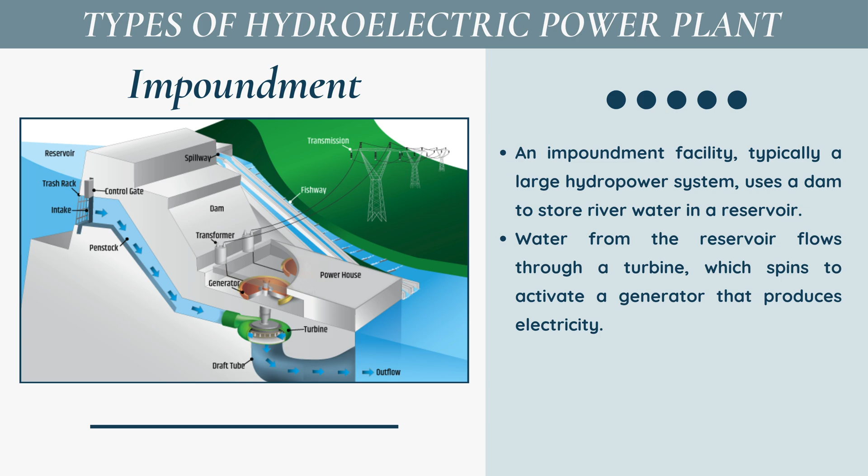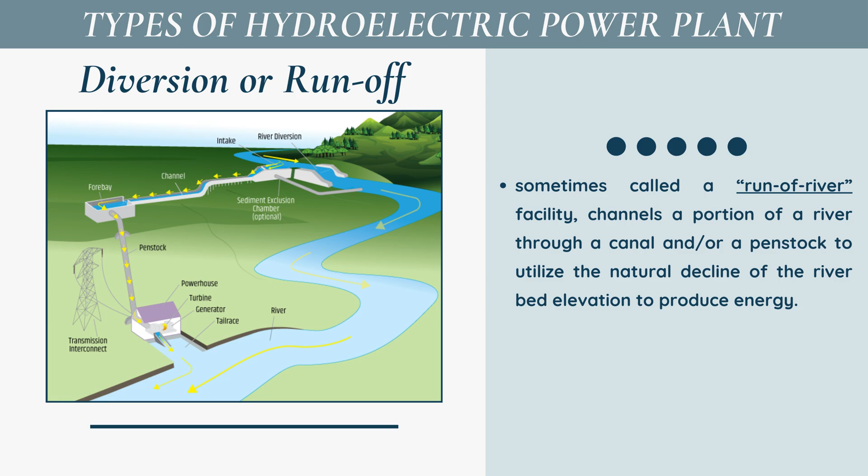The next type is diversion or runoff, sometimes called a run-of-river facility. It channels a portion of a river through a canal and/or a penstock to utilize the natural decline of the riverbed elevation to produce energy.

The last type of hydroelectric power plant is pump storage. It is called pumped storage hydropower or PSH, which works like a giant battery. A PSH facility is able to store the electricity generated by other power sources like solar, wind, and nuclear for later use. These facilities store energy by pumping water from a reservoir at a lower elevation to a reservoir at a higher elevation.

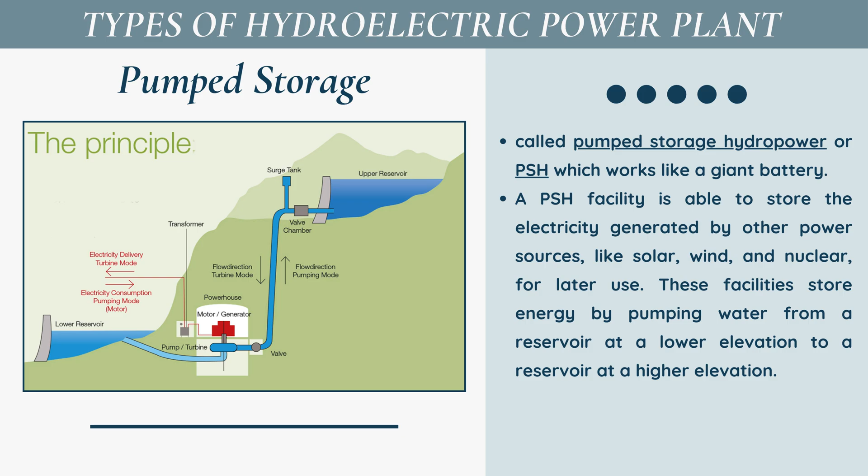The water is released from the upper reservoir to power hydro turbines located below the upper reservoir. Pump storage hydroelectric systems generally use more electricity to pump water to the upper water storage reservoirs than they produce with the stored water. Therefore, pump storage facilities have net negative electricity generation balances.

There are four types of turbines used in hydroelectric power plant. The first one is Pelton turbine. It is a type of impulse turbine and is designed to harness the energy of high-pressure water by directing it onto specially shaped buckets or cups attached to the turbine wheel.

Next is Kaplan turbine. It is a type of water turbine used in low to medium head sites. It features adjustable blades that allow it to efficiently adapt to varying water flow. This turbine has an axial flow design and is known for high efficiency in changing conditions.

Third is cross-flow turbine. It is a type of water turbine where water flows across the blades in two directions, first radially and then axially. It is typically used in low-head, small-scale hydroelectric plants. This turbine is simple, compact, and efficient for applications with moderate water flow.

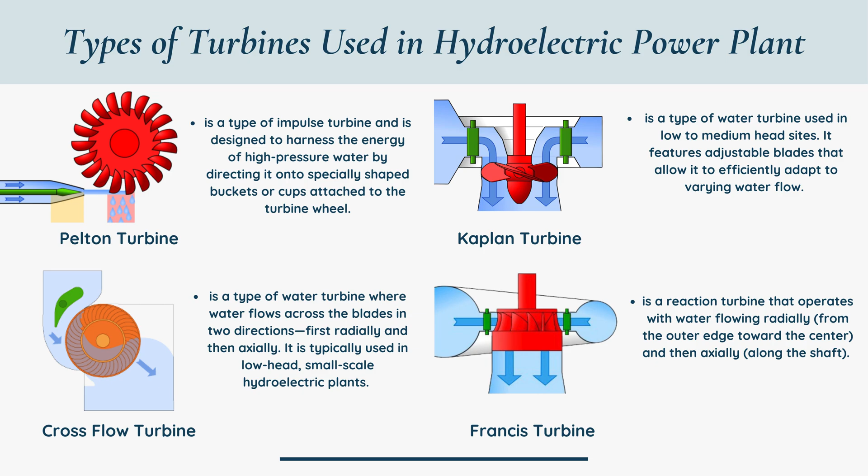The last one is Francis turbine. It is a reaction turbine that operates with water flowing radially, or from the outer edge toward the center, and then axially, or along the shaft.

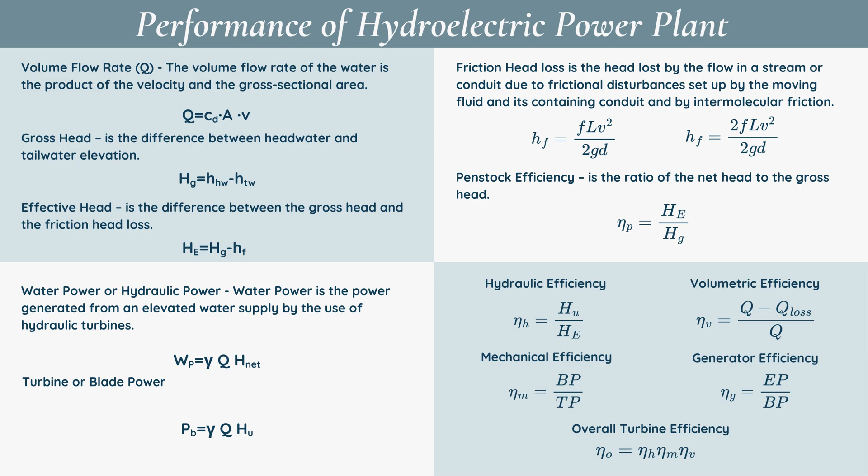These are the formulas that are needed in solving the performance of hydroelectric power plant. This includes volume flow rate, gross head, effective head, water power or hydraulic power, turbine or blade power, friction head, and the different types of efficiency, which includes penstock efficiency, hydraulic efficiency, volumetric efficiency, mechanical efficiency, generator efficiency, and overall turbine efficiency.

Then we have the sample problems. Number 1: A hydroelectric power plant consumes 60 times 10 raised to 6 kilowatt-hour per year. What is the net head if the expected flow is 1,500 cubic meter per minute and overall efficiency of 63%?

First, you have to analyze what are the given values and what are the required values in this problem. 60 times 10 raised to 6 kilowatt-hour per year is the energy power. 1,500 cubic meter per minute is the expected flow or Q, and overall efficiency is 63%.

In order to get the net head, we have to use the formula: power equals gamma Q H. But we have a missing value, which is the water power, or P sub B. We can get the value of the water power using the other formula of efficiency, which is efficiency equals energy power over water power.

We have the value of efficiency and the energy power. Derive the formula and we'll get P sub B equals energy power over efficiency.

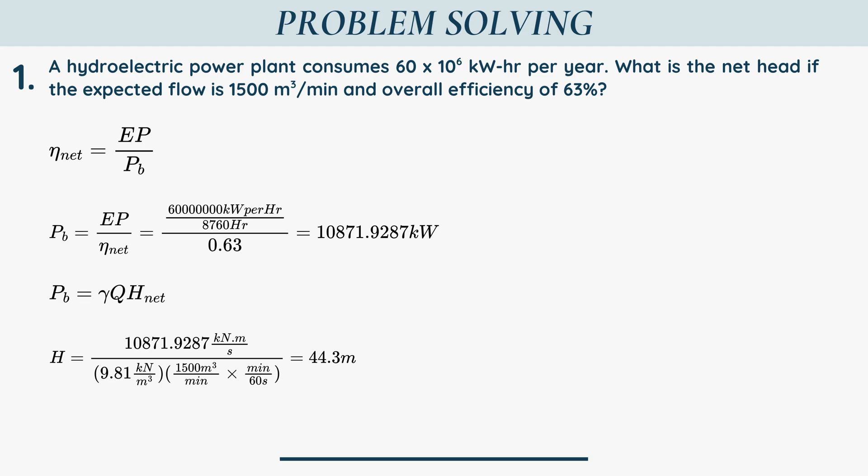Substitute the values: 10,871.9287, breaking down the units of kilowatts into kilonewton meter per second, all over the value of gamma, which is 9.81 kilonewton over cubic meter, multiplied by Q, which is 1,500 cubic meter per minute. Convert minutes into seconds, then cancel kilonewton, cubic meter, and seconds. Calculate, and we get the answer of 44.3 meters.

Number 2. A hydraulic turbine receives water from a reservoir at an elevation of 100 meters above it. What is the minimum water flow in kilogram per second to produce a steady turbine output of 50 megawatts?

Analyze the problem first, then get the given values. We have the head of 100 meters and the power of 50 megawatts. The required value is the minimum water flow, or Q.

Since we have the given values of H and power, we can get the value of the water flow using the formula power equals gamma QH. Derive the formula and we'll have Q equals P over gamma H.

Substitute the given values since we need to cancel the unit of kilonewton. Instead of 50 megawatts, input 50,000 kilonewton meter per second, the breakdown unit of kilowatts, divided by gamma of 9.81 kilonewton over cubic meter, multiplied by the head of 100 meters, then cancel the kilonewton meter.

Since we need the answer in kilograms per second, and we only have cubic meter per second, we have to convert cubic meter into kilogram. Multiply by 1,000 kilogram over cubic meter. Cancel cubic meters and calculate, and we'll have the answer of

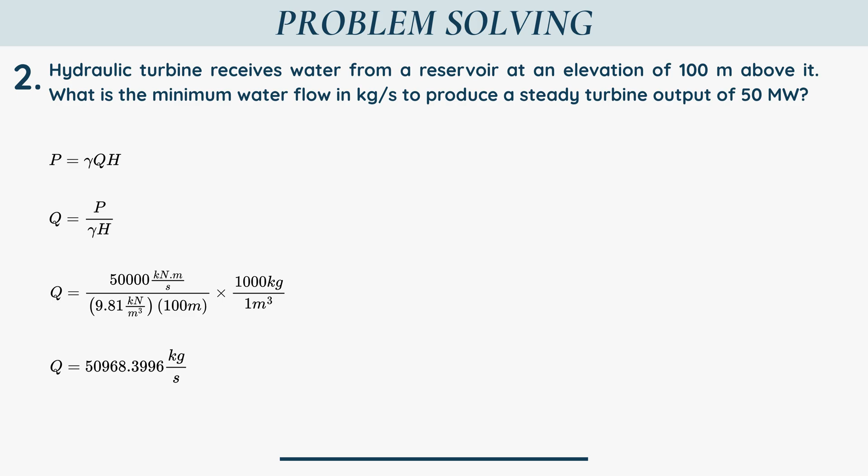50,968.3996 kilogram per second. Number 3.

A reaction turbine develops 500 bhp, or brake horsepower. Flow through the turbine is 50 CFS, or cubic feet per second. Water enters at 20 FPS, or feet per second, with a 100 feet pressure head. The elevation of the turbine above the tailwater level is 10 feet.

Find the effective head. Analyze the given: brake horsepower of 500, a flow rate Q of 50 cubic feet per second, velocity of 20 feet per second, pressure head of 100 feet, and elevation of turbine of 10 feet above tailwater. The required value is the effective head, or H.

Using the formula H equals pressure head plus inlet velocity squared minus outlet velocity squared, all over 2g or the gravitational constant, plus z, or elevation.

Since there is no derivation needed, substitute all the given values. H equals 100 plus 20 squared minus 0 squared, all over 2 multiplied by the English constant value of g, which is 32.2, plus 10. Cancel feet per second and calculate, and we get the answer of 116.2 feet.

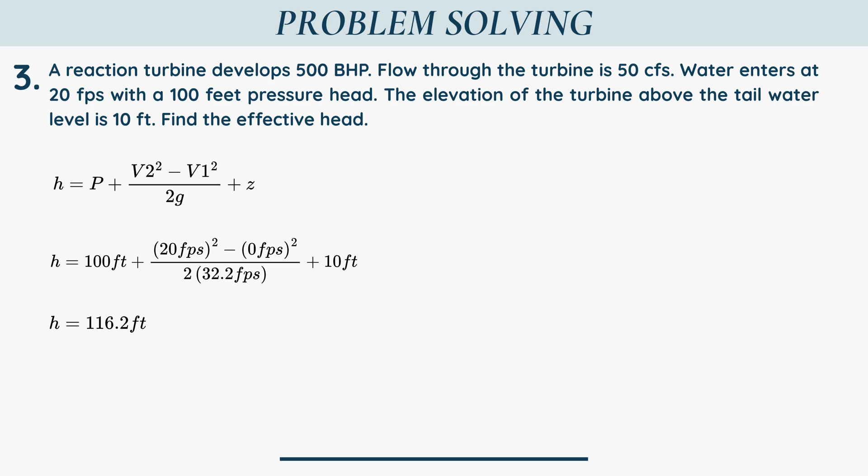Number 4. A river flows at 30 cubic meters per second and develops a total brake power of 5 megawatts. What is the available head if it is proposed to install 2 turbines with 85% efficiency each?

Analyze the problem, and we have the givens of flow Q of 30 cubic meters per second, brake power of 5 megawatts, and an efficiency of 85%. The required value is the available head, or H.

We can get the head using the formula power equals gamma QH, but we need to get the missing value of water power first. Using the formula efficiency equals brake power divided by the turbine power, derive it in terms of turbine power: turbine power equals brake power divided by efficiency. Substitute the values of 5 megawatts, or 5,000 kilowatts, divided by 0.85.

We'll get 5,882.35 kilowatts. Turbine power is also equal to the water power. Now, using the formula of water power, derive it in terms of H, or head. Therefore H equals water power over gamma Q. Then substitute the values.

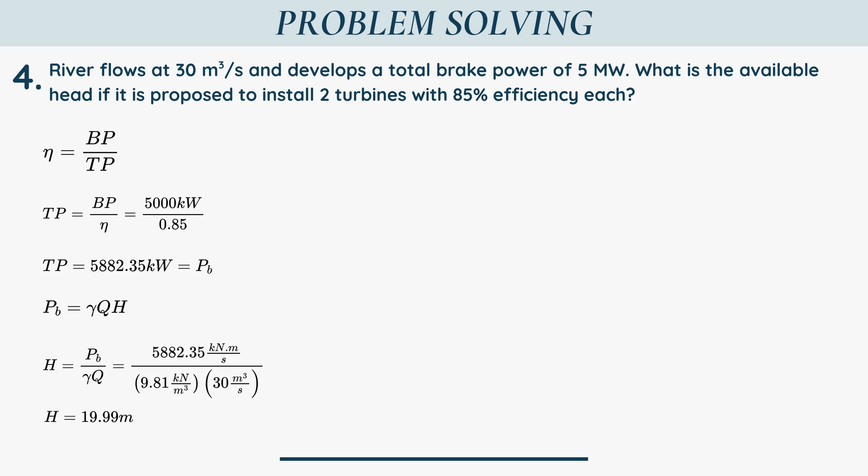Number 5. The specific speed of a turbine is 85 RPM and is running at 500 RPM. What is the maximum power delivered by the generator if the head is 25 meters and generator efficiency is 90%?

Analyze the problem, and we have the givens of specific speed, N sub S, of 85 RPM, actual speed N of 500 RPM, head of 25 meters, and generator efficiency of 90%. The required value is maximum power, P, or generator power.

Using the formula of specific speed equals actual speed multiplied by the square root of bhp, all over h raised to 5 over 4, then derive it in terms of bhp.

Substitute the values: squared quantity of 85 rpm multiplied by 25 meters, converted into feet by multiplying by 3.28 feet over 1 meter, raised to 5 over 4, all over 500 rpm. Calculate bhp.

We get 1761.02. After getting it, we can now get the output power using the generator efficiency formula: output power divided by brake power.

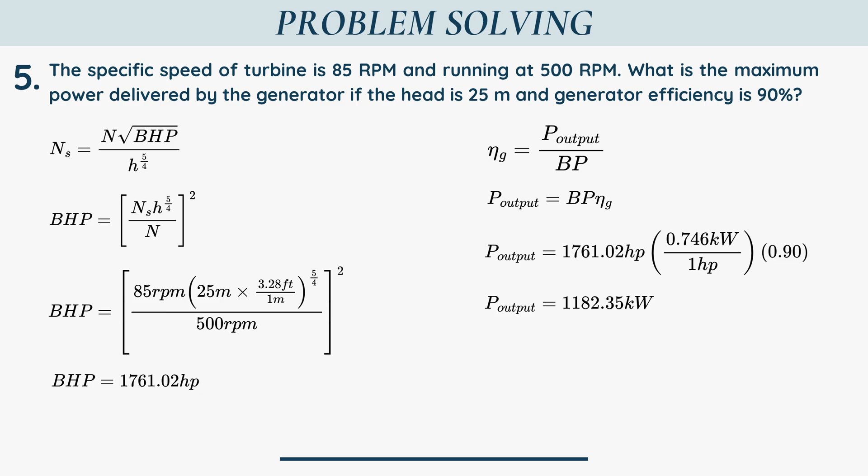Deriving it, output power equals brake power multiplied by generator efficiency. So we have 1761.02 multiplied by the conversion of 0.746 kilowatts over 1 HP, then multiplied by 0.90. Calculating, we get the answer of 1182.35 kilowatts.

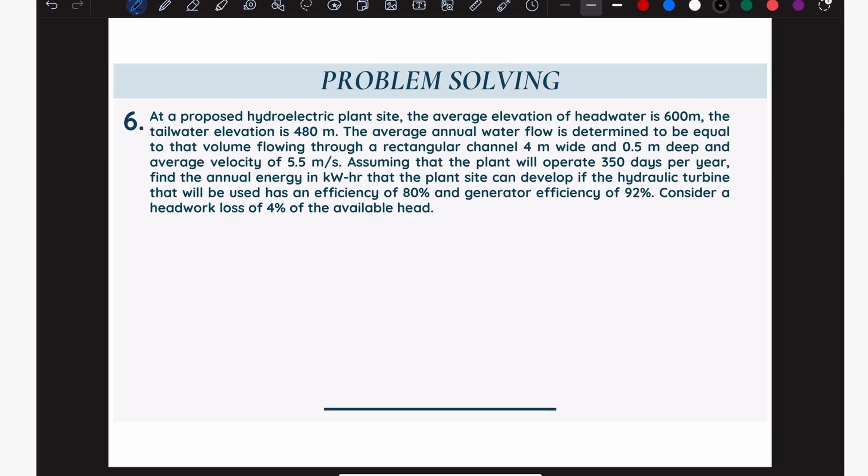Number 6: at a proposed hydroelectric plant site, the average elevation of headwater is 600 meters. The tailwater elevation is 480 meters. The average annual water flow is determined to be equal to that volume flowing through a rectangular channel 4 meters wide and 0.5 meters deep, with average velocity of 5.5 meters per second. Assuming the plant will operate 350 days per year, find the annual energy in kilowatt-hour that the plant site can develop if the hydraulic turbine used has an efficiency of 80% and generator efficiency is 92%. Consider a headwork loss of 4% of the available head.

So let's start. Let's write down the given. The given is the headwater, height of the headwater at 600 meters, and height of the tailwater at 480 meters.

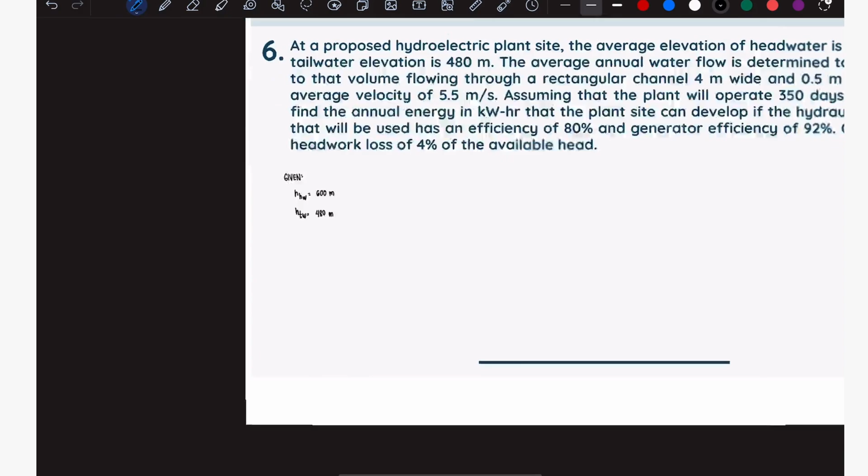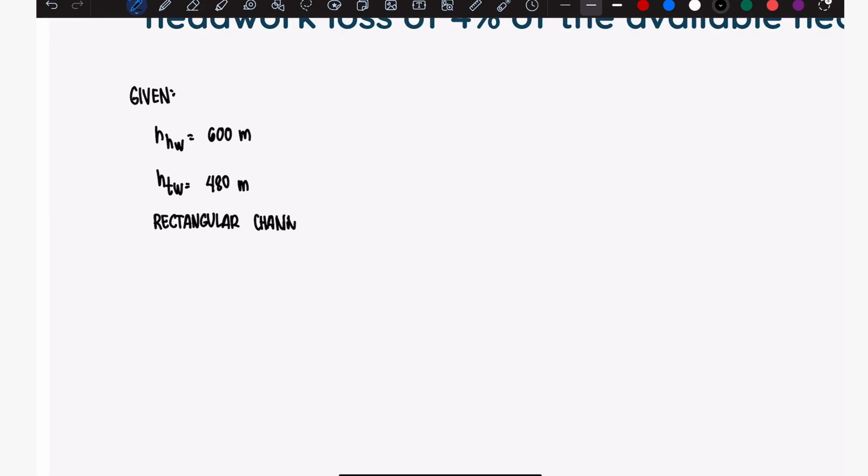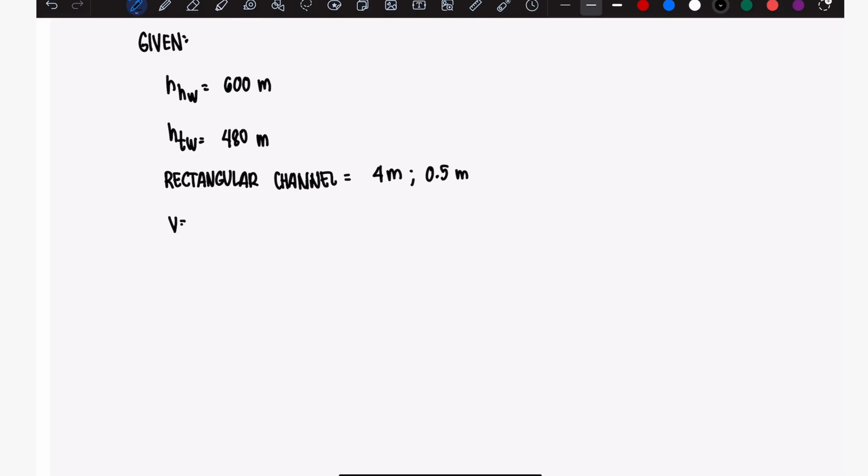It flows in a rectangular channel, 4 meters wide and 0.5 meters deep, with a velocity of 5.5 meters per second. The plant will operate for 350 days per year.

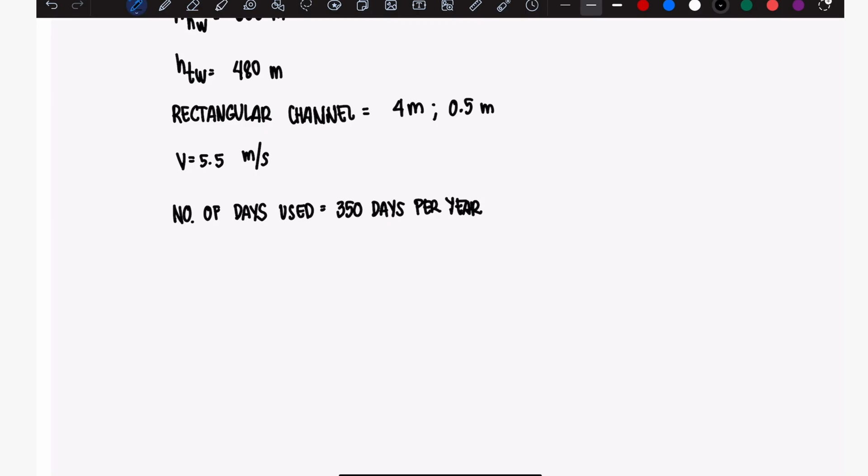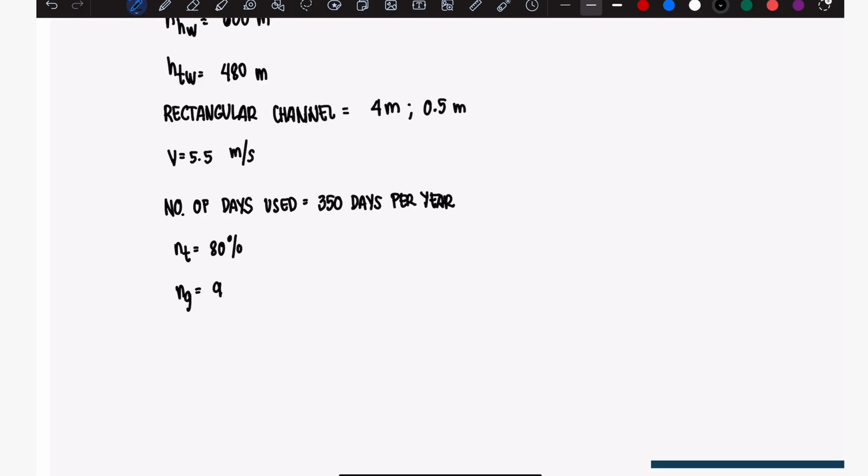And then for efficiencies, first is the turbine efficiency, which is 80%, and then generator efficiency of 92%. Also, there's a headwork loss of 4%.

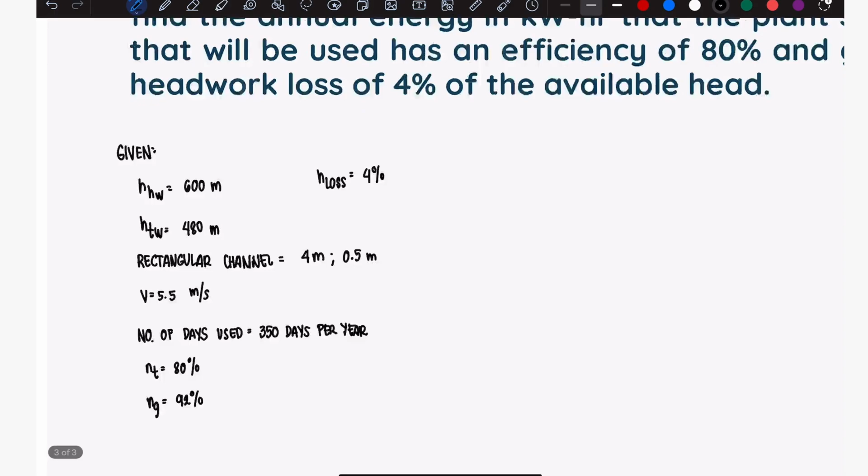Our unknown is the annual energy, which needs to be in kilowatt-hour.

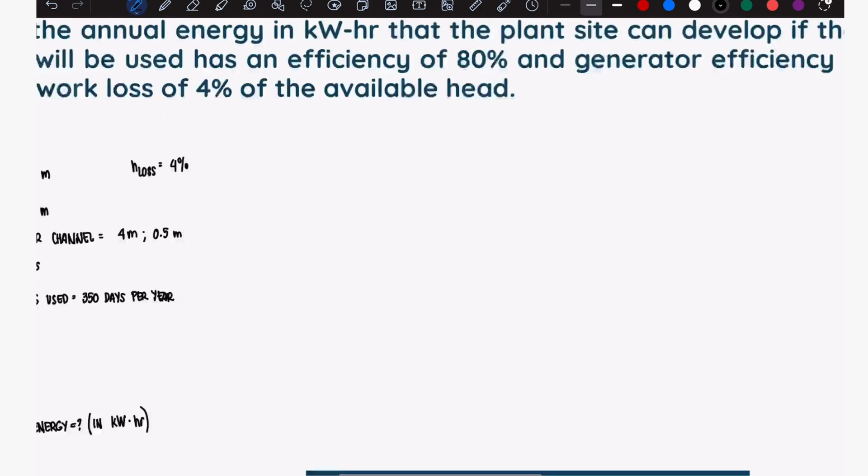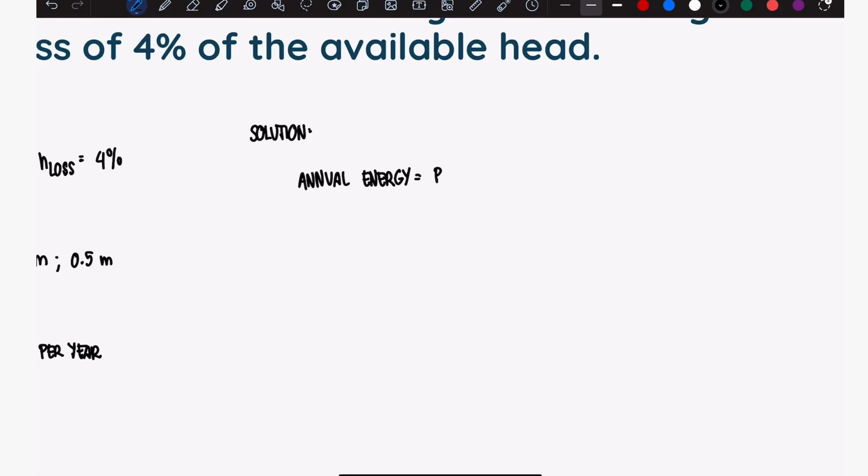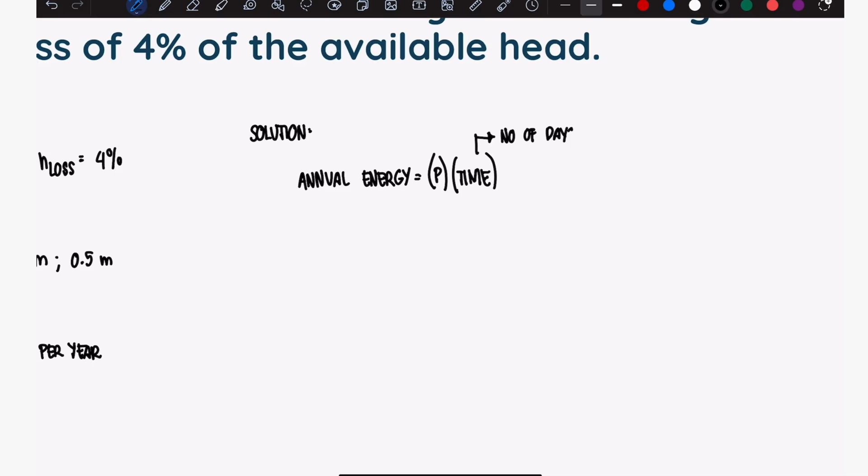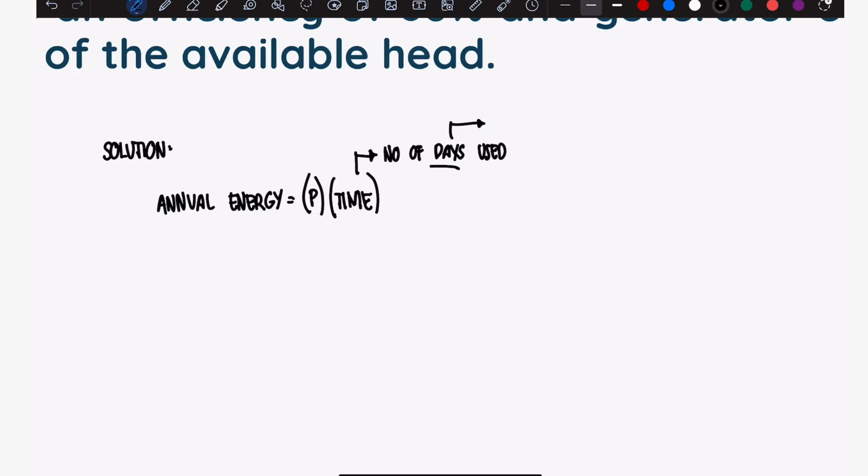Let's proceed to the solution. So to find the annual energy, we need power times time. This time refers to the number of days used. But since we need this in hours, we convert the days into hours.

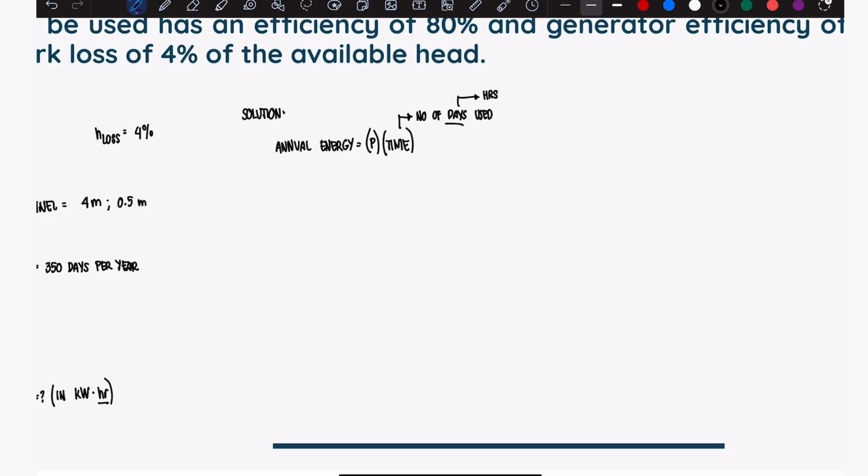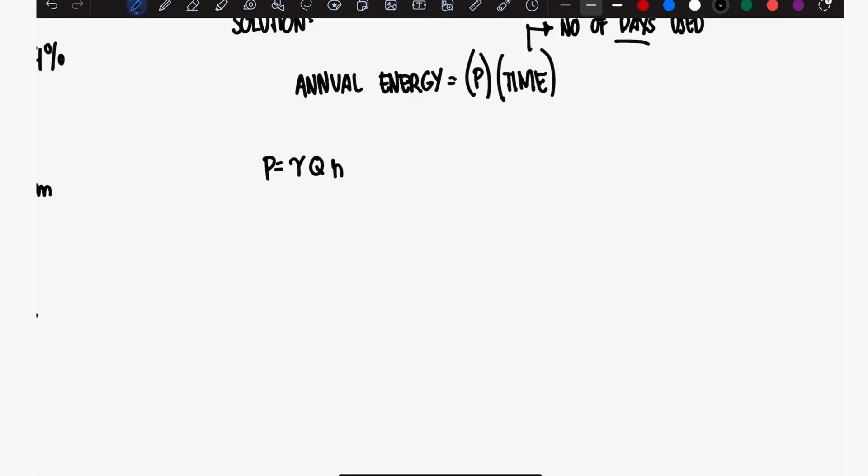We don't have a given power. For power, the formula is gamma of water times volumetric flow rate times height of the headwater. This is the formula for power, and this is all we have.

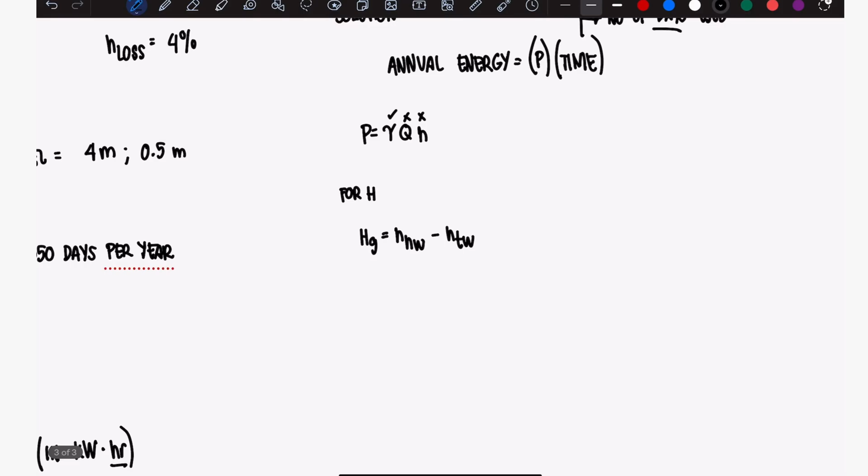These two we don't have, so we'll solve for them. For H, we have to go for HG because the formula for HG is headwater minus tailwater. Both are given, so we just plug in.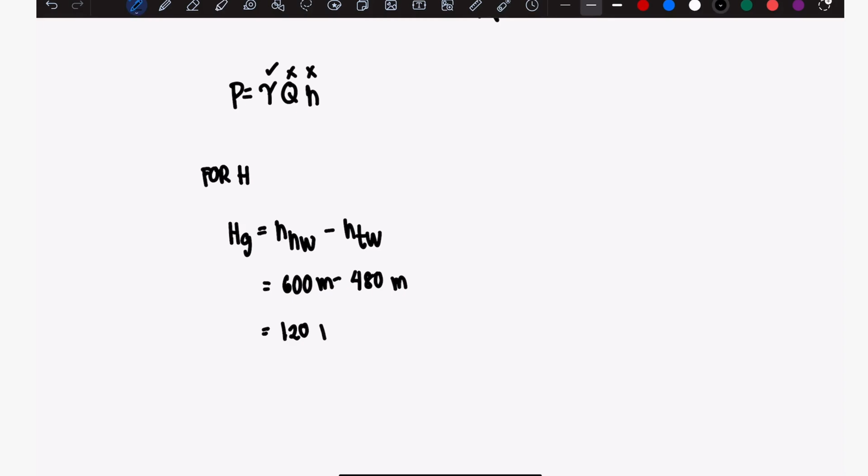600 meters minus 480 meters, which is 120 meters. But there's an H loss of 4%.

So what happens is HG, H equals 120 meters minus 0.04 times 120. 120 minus 0.04 times 120 gives us 115.2 meters.

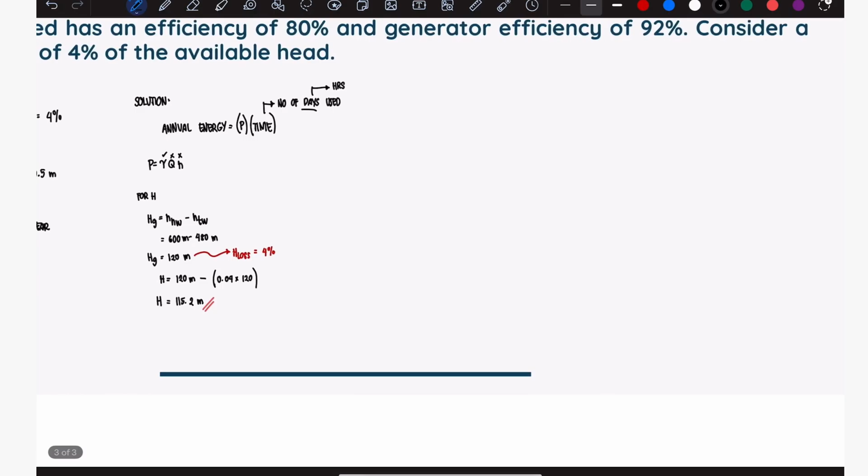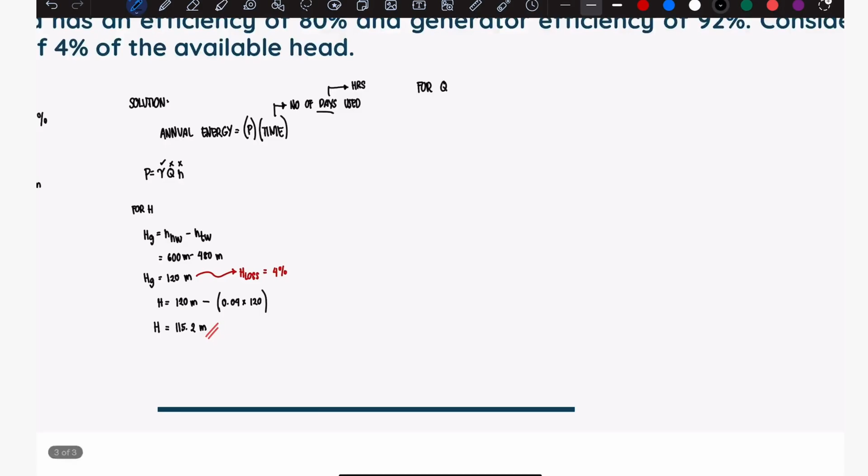That's one. Next is the volumetric flow rate. For volumetric flow rate, we have the formula area times velocity. Our area, as stated earlier, is a rectangular channel, so 4 meters wide times 0.5 meters deep, times the velocity of 5.5 meters per second.

Let's calculate: 0.5 times 4 times 5.5. We get 11 cubic meters per second. This is our volumetric flow rate.

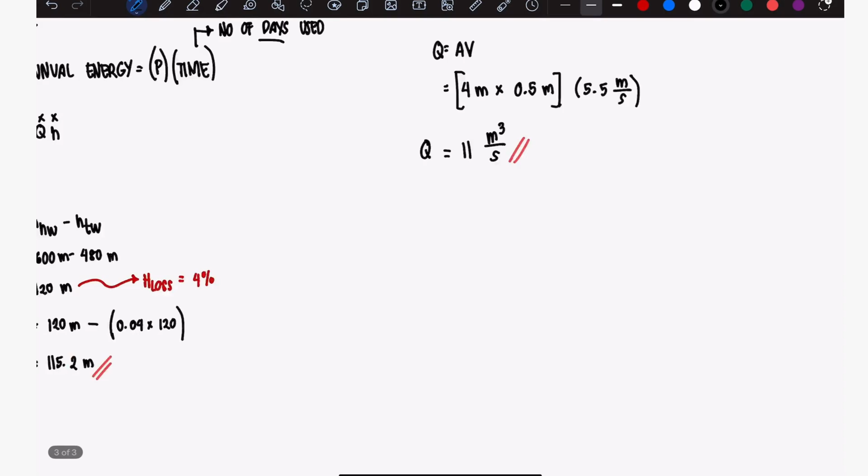So we've found Q, and we already have H. We can now find P, or the power. So gamma of water, times the volumetric flow rate, times height of the headwater, times, since the efficiencies are given, we'll consider those too.

We'll multiply them in at the end, joining them into the equation. Now to start the equation, let's plug in the values. Gamma of water is 9.81 kilonewtons over cubic meter.

Our Q is just above, 11 cubic meters per second, times our height of 115.2 meters, times turbine efficiency, which is 80%, or let's just put 0.8, and then the generator efficiency is 0.92. Let's calculate: 9.81 times 11 times 115.2 times 0.8 times 0.92.

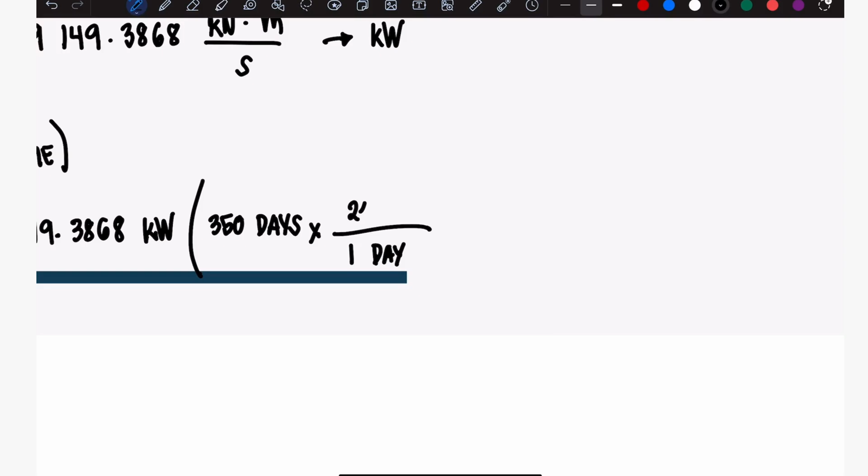1 day equals 24 hours. Let's calculate: 9,149.3868 times 350 days times 24 hours. We get the answer of 76,854,849.12 kilowatt-hour.